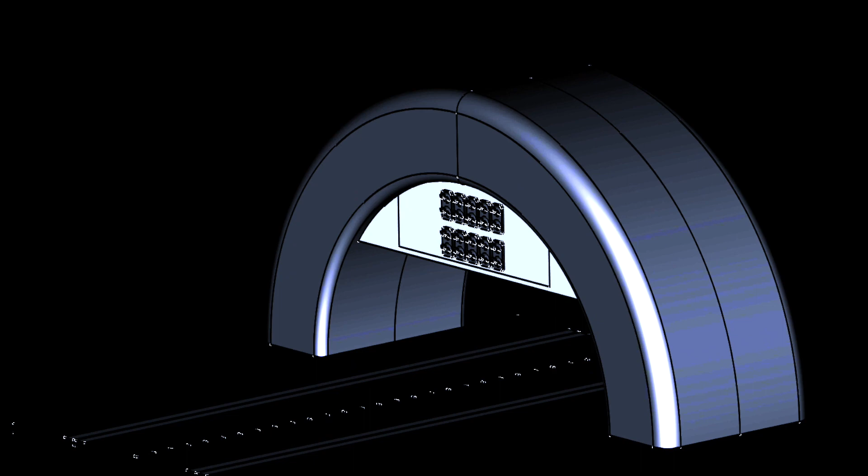Today it's about a 3D printed housing for electronics with clever features. Magnets are holding it together instead of screws. Our new electronics casing design is comprising some clever features that you can use for other housings as well.

The prototype of our slot car lap counter is integrated into our racetrack, and we enjoy the features which we specified and implemented ourselves. We documented its development in earlier videos. It's no hurdle for DIY electronics fans, but I need to admit that the assembly was a bit complex. Today I have good news for everyone. It will become much easier to build that lap counter.

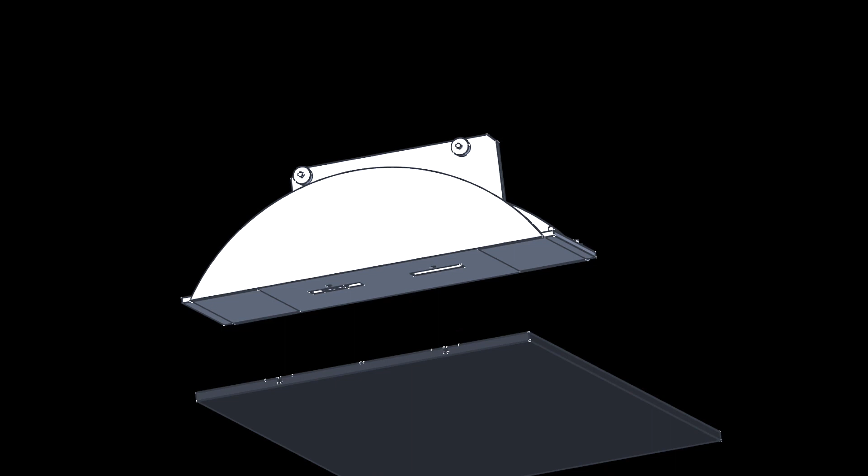Today we are designing a suitable casing for the printed circuit board that we recently introduced. Like the electronics printed board, the housing has become more compact, and we are making sure that the assembly is becoming much easier. First of all, we have the inner part of the housing that carries the electronics boards. Inside we find some bases with small knobs that fit exactly into the mounting holes of the printed circuit boards. You simply put the electronics on it and then secure the board with a little paint. I'm recycling my wife's nail polish, which is no longer in use because the color is out of fashion.

These are the sockets for the main board with the LEDs and the ESP32 board. The relay board goes in here on the side. The bases on the other side are intended to mount a small universal printed board. I'm not using them yet. You can use them in case you want to add any further electronics to it.

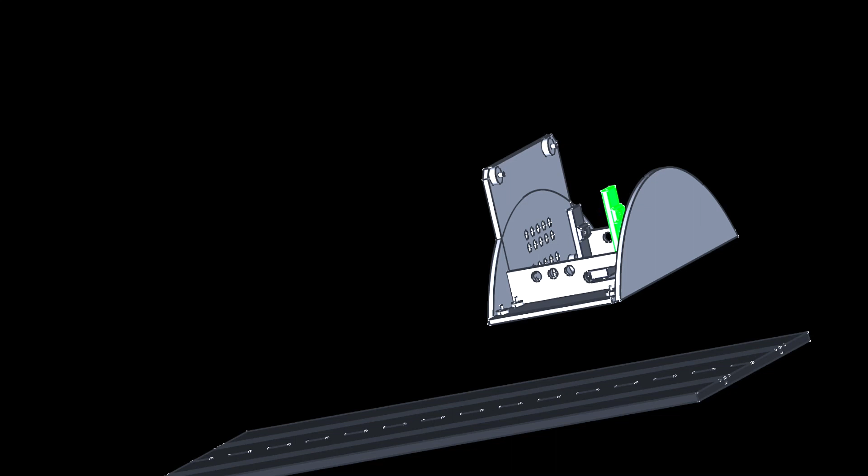The holes for the 5mm LEDs each have a diameter of 5.3 mm. This gives us some room to compensate for the small deviations we are likely to get when soldering in the LEDs. The brackets for the two infrared sensors are adjustable so that we can adapt the sensors to different track widths. The two crossbars are giving the inner part stability, and we have some holes for cable ties to fix our cables.

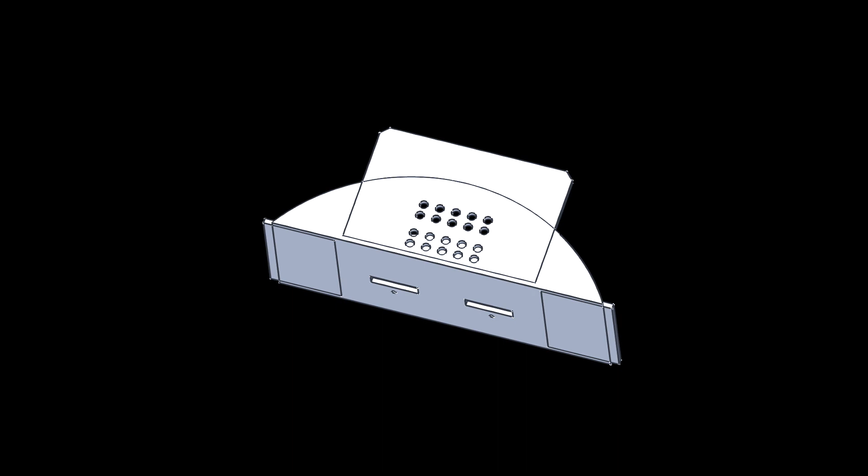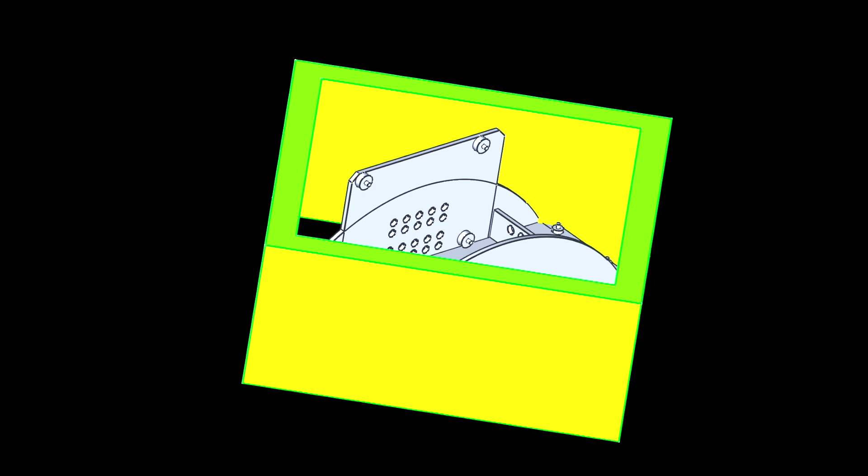The inner part is over 200 mm wide, and that might be a problem for smaller 3D printers when it exceeds the maximum printing span. Of course, that would be a shame. That's why I thought of a little trick and cut the corners so that a 195mm x 195mm printing area is enough to print the part. I clipped the corners in FreeCAD using a Boolean operation between the green body and the original inner part. When assembled, you won't see the clipped corners because they are covered by the front and back parts of the housing.

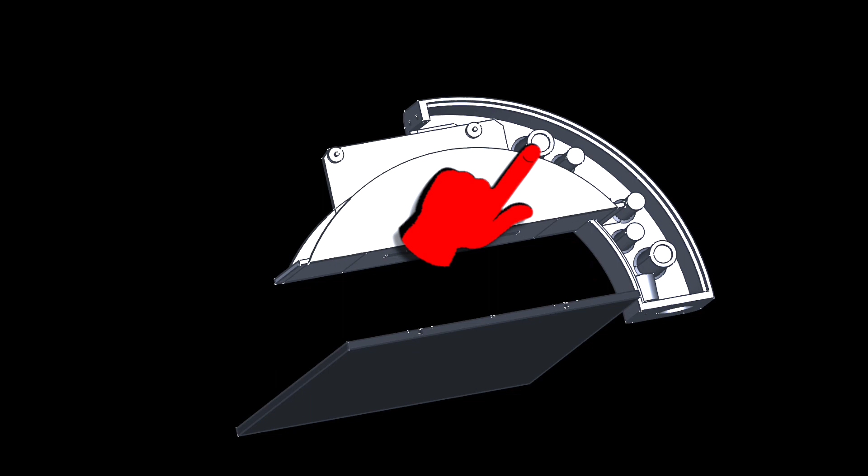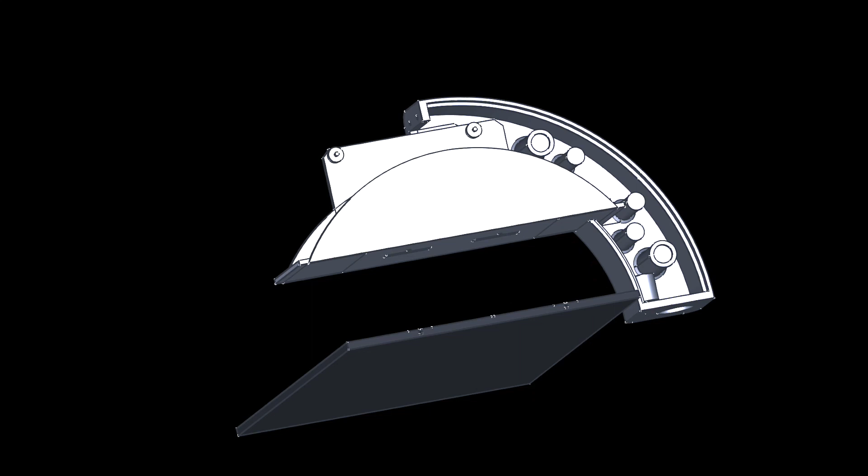Now we see the front parts of the casing. And there is an interesting detail here. Small neodymium magnets are simply glued into these two holes and will later hold the housing together. The magnets are 20mm in diameter times 2mm. The three other bases we can use as a strain relief for the cables, which we will lead into the housing through the hole at the bottom. Optionally, you can attach the casing to the base plate of your model racetrack with long screws that are going through the bases at the bottom. The only screws that are really needed are two M3 screws that hold the front parts together up here.

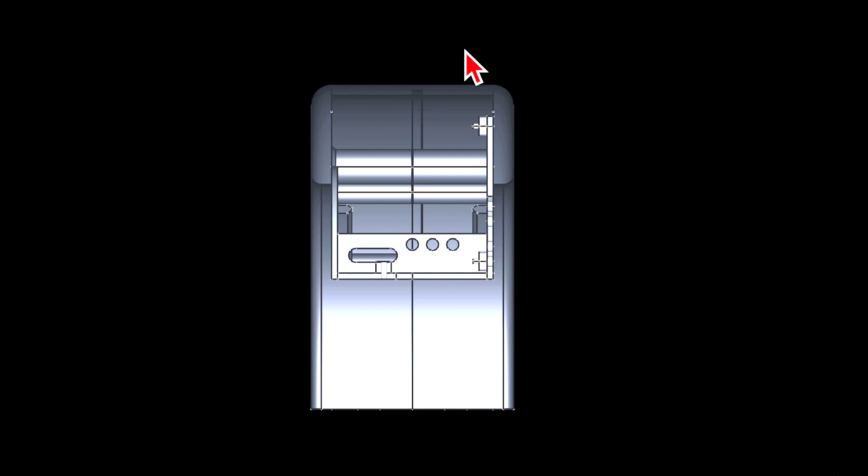Now the two back parts are added. By the way, the parts are all different. It is a tongue and groove construction so that the shapes interlock and form a stable shape when nested together. Let's take a closer look. We need to consider certain tolerances when 3D printing, which is why you see the small gaps in the construction here. In this way, we make sure that we can really put the pieces together.

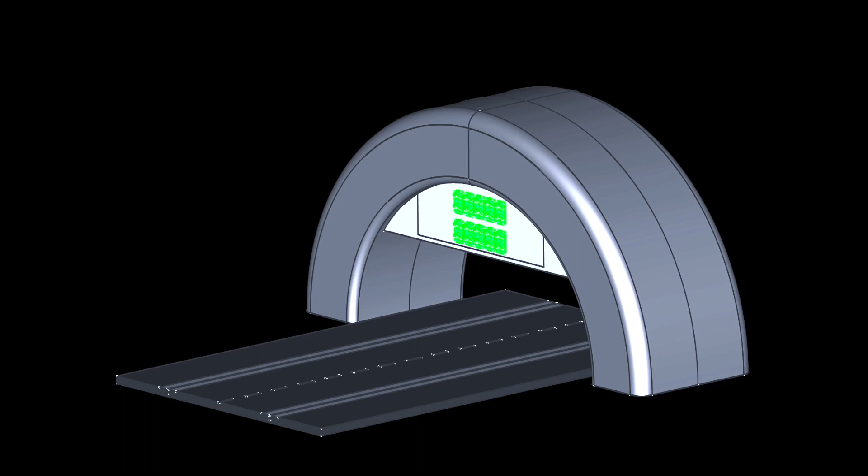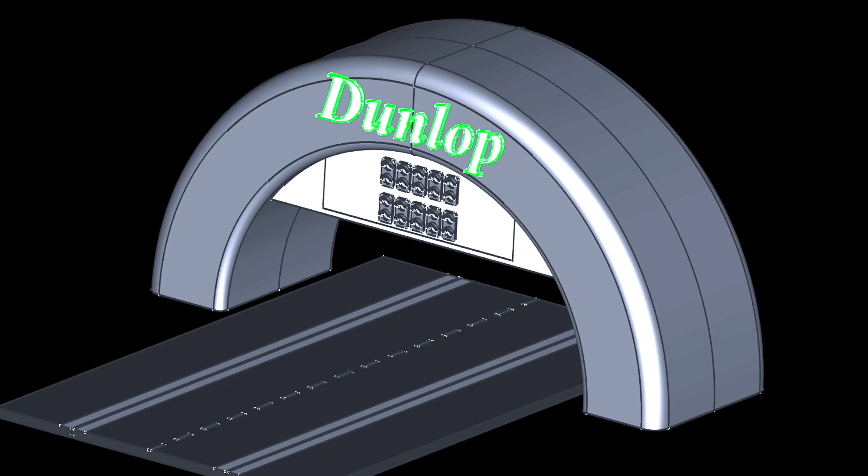At the end, the starting light covers are added. I need to mention that for these little parts you have to get the best accuracy out of your printer in order to get the detailed structures. And oh yeah, I almost forgot to mention this. We have 3D printed letters that you can glue on. I tried to attach the inscription according to the curved housing. It wasn't that easy with the cursive letters. You really need to take your time for this.

This is what the finished new version looks like. It's more compact compared to the prototype. The look comes close to a racing tire. Cool, isn't it? But the older prototype design is already looking damn good too. I can't decide which design I like best. In the end, it's a matter of taste.

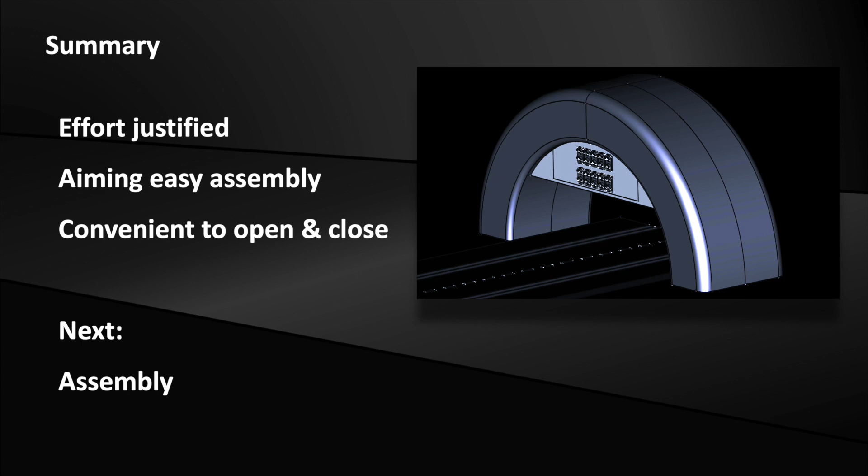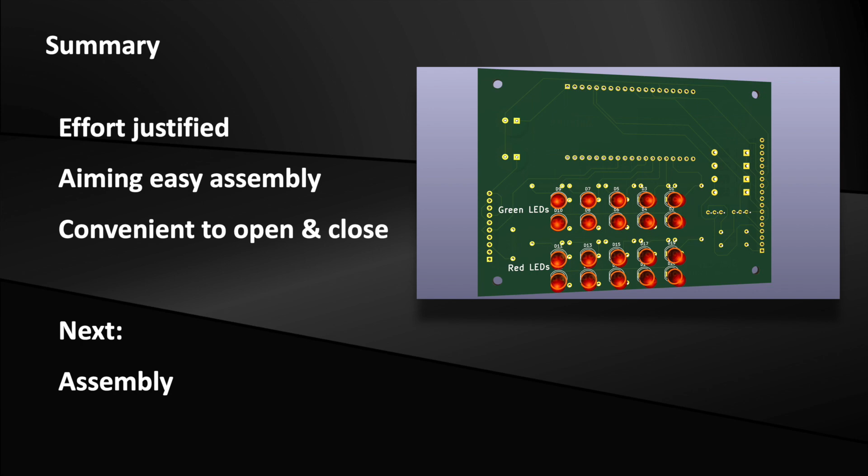I like both designs from an aesthetic point of view. With the version 2.0 we can build the project much easier and faster now. Of course, the printed circuit we designed is also helping a lot on that. Our Arduino code version 3.3.2 is running stable. However, we will improve the code further and we will add new interesting features.

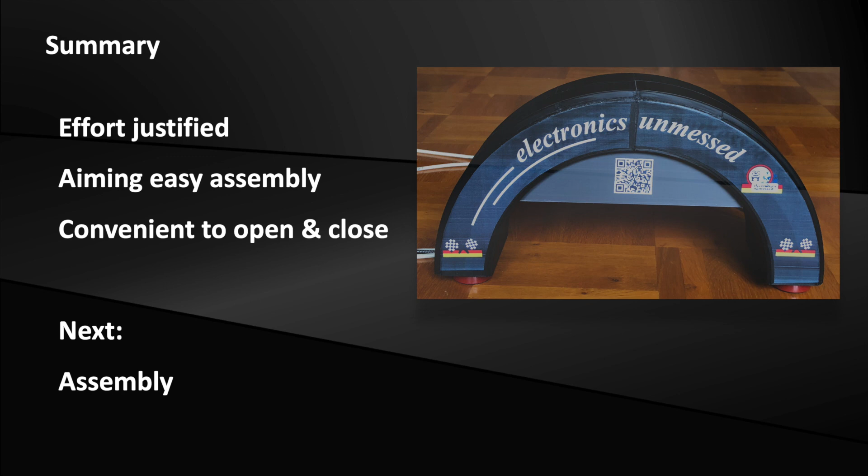The principle with the neodymium magnets works great. It actually makes opening and closing very convenient. I will certainly use this trick for other projects too. In the coming video we will discuss the assembly.